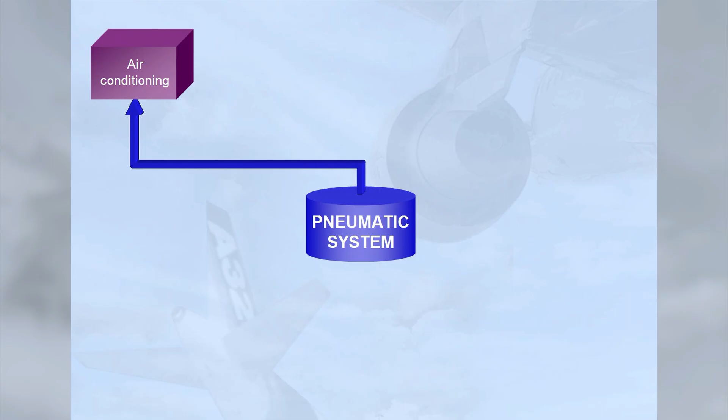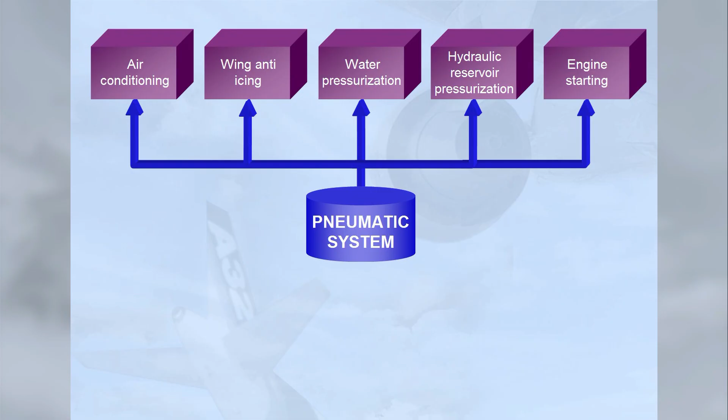The A320 pneumatic system supplies high-pressure air for air conditioning, wing anti-icing, water pressurization, hydraulic reservoir pressurization, and engine starting. High-pressure air can be supplied from three sources: the engine bleed system, the APU, or an external high-pressure ground power unit.

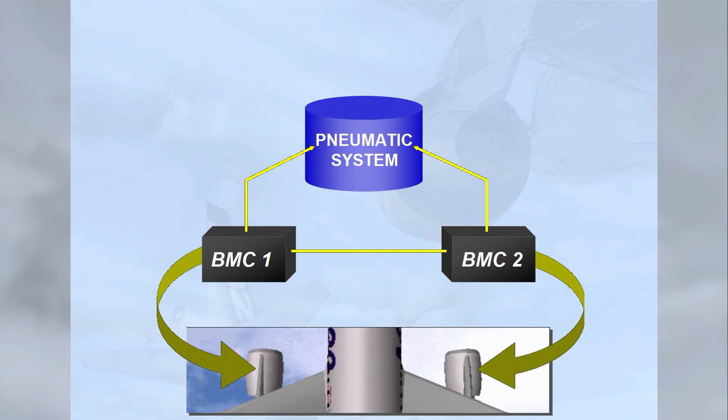The pneumatic system is controlled and monitored by two bleed monitoring computers, BMC. There is one BMC for each engine bleed system. Both BMCs are interconnected, and if one fails, the other takes over most of its functions.

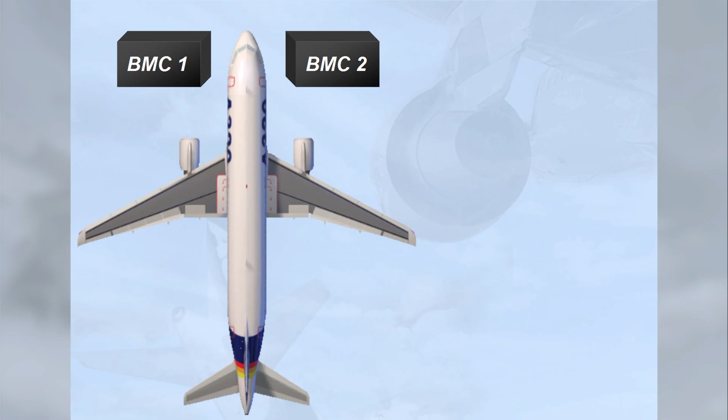There are hot air leakage detection loops installed in the vicinity of the hot air ducts in the fuselage, wings, and pylons. If a leak is detected, a signal is sent to the BMCs, which automatically isolate the affected area.

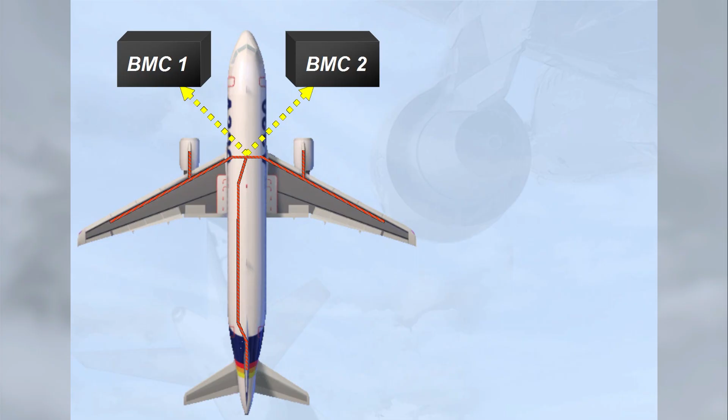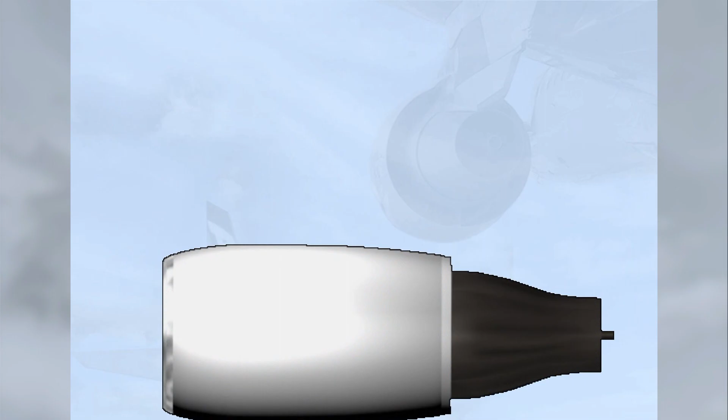In flight, the primary source for high-pressure air is the engines. Both engines have similar bleed systems. Air is bled from two compressor stages of the engine, the intermediate pressure IP port and the high pressure HP port.

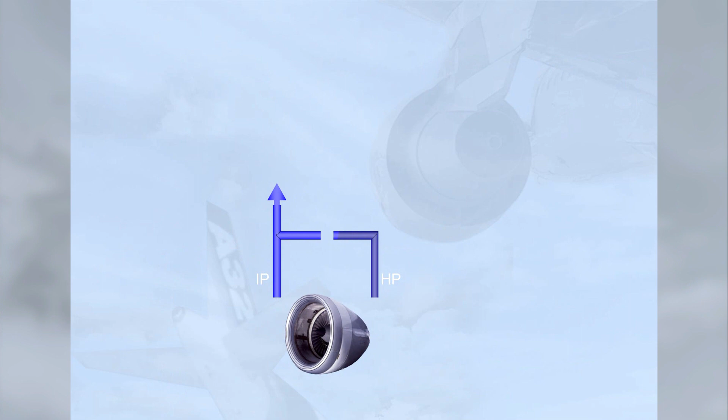There is an HP valve which can cut off bleed air from the high pressure port. It is automatically controlled by the system.

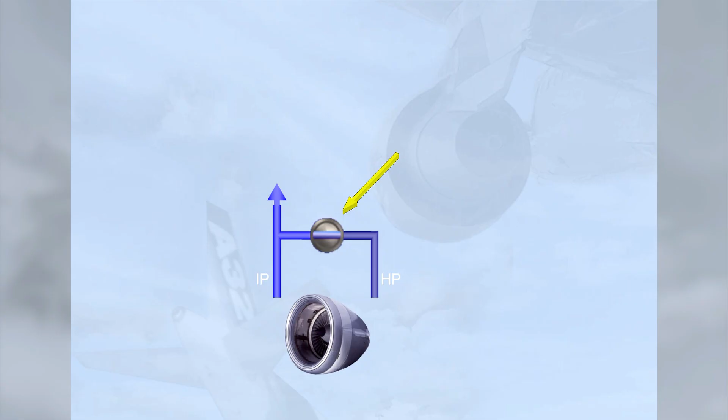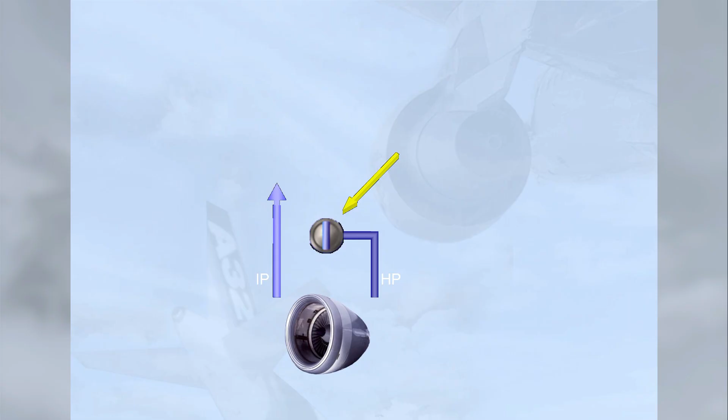The high pressure section HP is only used when there is insufficient pressure from the intermediate output IP, i.e. when the engines are at idle. Once the engine speed is high enough, the IP pressure is sufficient and the HP valve closes.

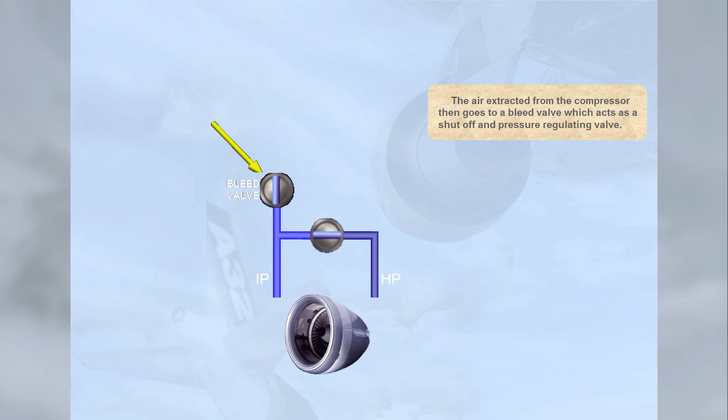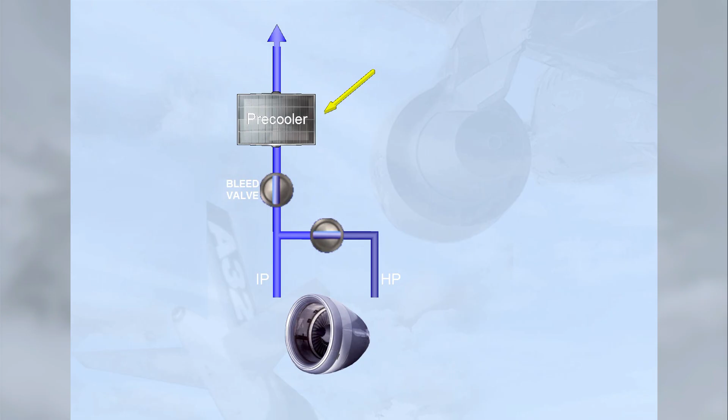The air extracted from the compressor then goes to a bleed valve which acts as a shutoff and pressure regulating valve. Since the temperature of the bleed air is high, it passes through a pre-cooler before being distributed to the users. The pre-cooler uses cool air from the engine fan to regulate the temperature.

Engine 2 has an identical bleed system. Both systems are connected by a cross-bleed duct. A cross-bleed valve permits their interconnection or isolation.

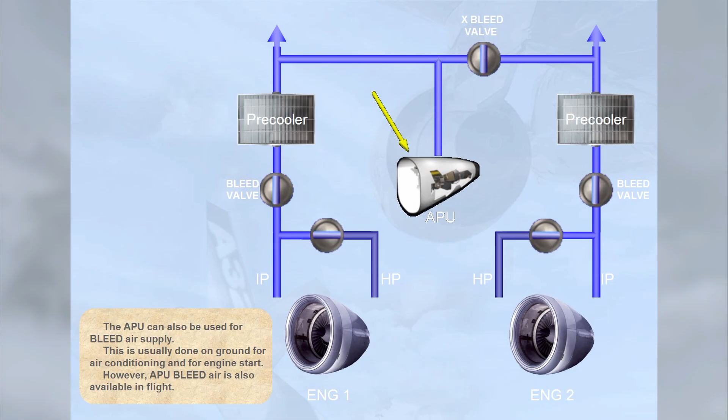The APU can also be used for bleed air supply. This is usually done on ground for air conditioning and for engine start. However, APU bleed air is also available in flight. APU bleed air is controlled by the APU bleed valve, which operates as a shutoff valve.

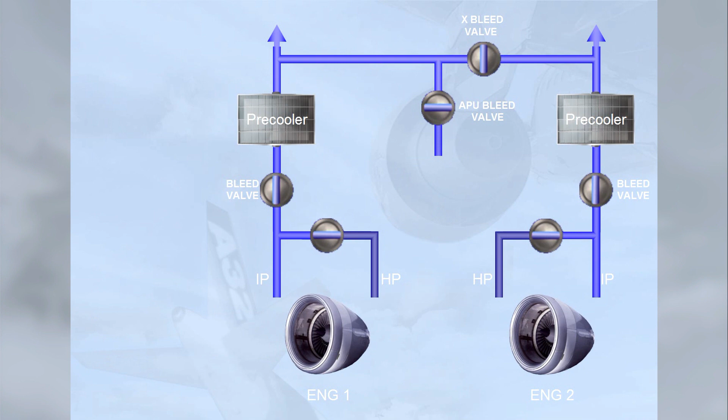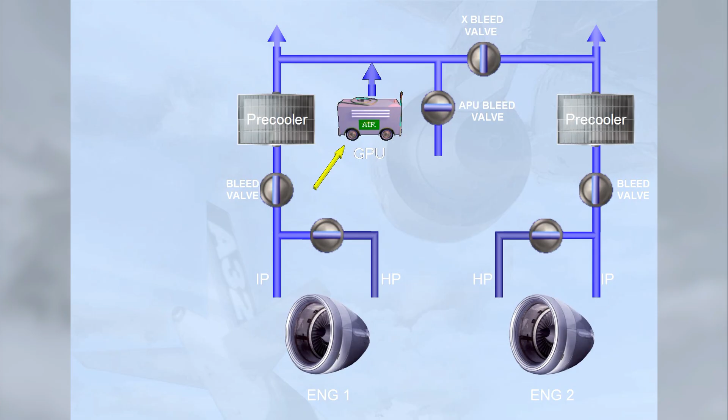Should the APU not be available, a high-pressure ground power unit can be connected. This completes the pneumatic system. We will now show you how system information is displayed to the pilots.

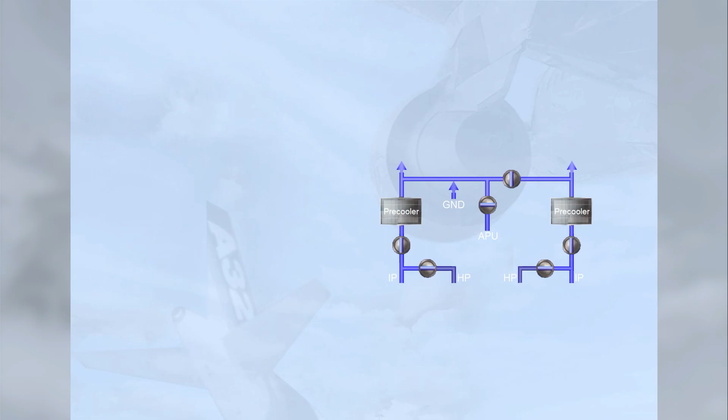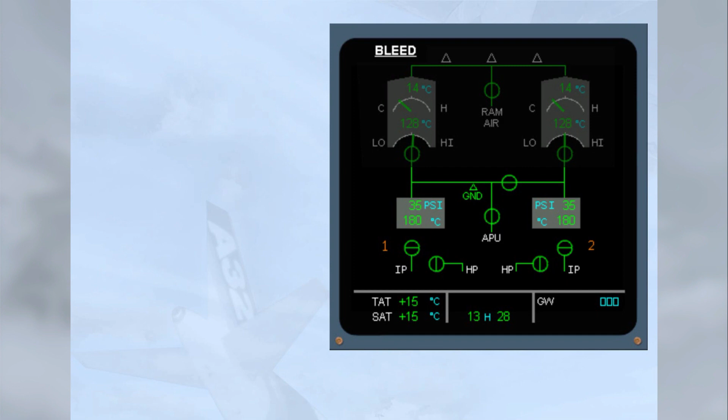The pneumatic system is displayed on the ECAM bleed page. Information on the pneumatic system is displayed on the lower part of the ECAM bleed page. Note, we have shaded the upper part of the ECAM bleed page because it is related to the air conditioning chapter. This will be covered in a later module.

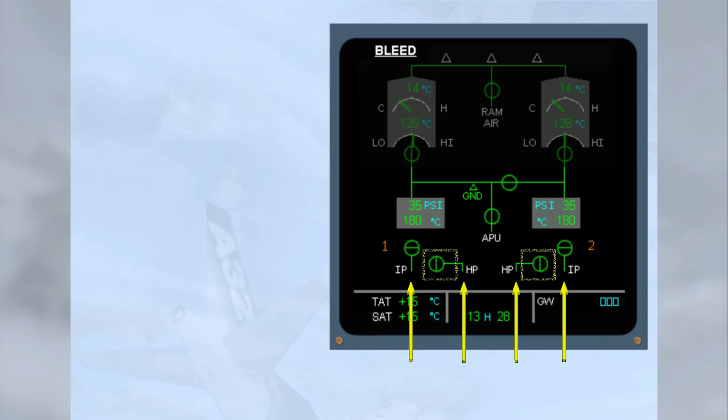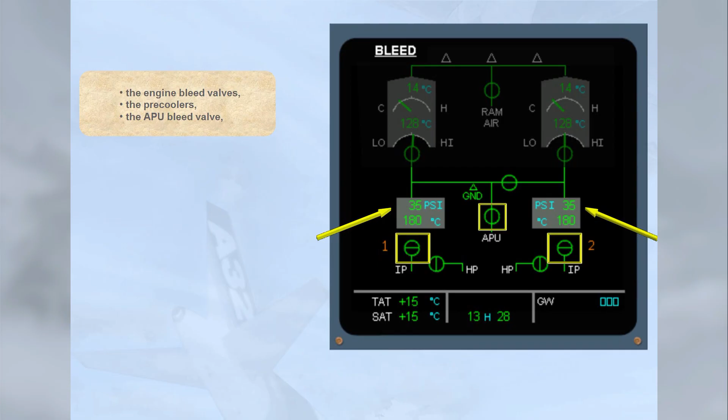Let's identify the system components on the ECAM page now: the IP and HP ports, the HP valves, the engine bleed valves, the pre-coolers, the APU bleed valve, the cross-bleed valve, the high-pressure ground connection.

The following information is also displayed: bleed air pressure, bleed air temperature, engine identification numbers.

Controls for the pneumatic system are part of the air conditioning panel, located on the overhead panel. Again, we have shaded the controls which belong to the air conditioning chapter.

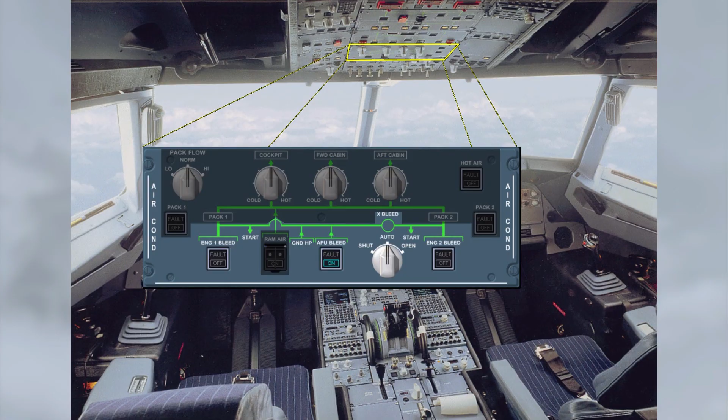Each engine bleed valve is controlled by its associated push-button switch on the air conditioning panel. The APU bleed valve is controlled by its associated push-button switch. The cross-bleed selector enables the pilot to open and close the cross-bleed valve manually or to let the system operate the cross-bleed valve automatically.

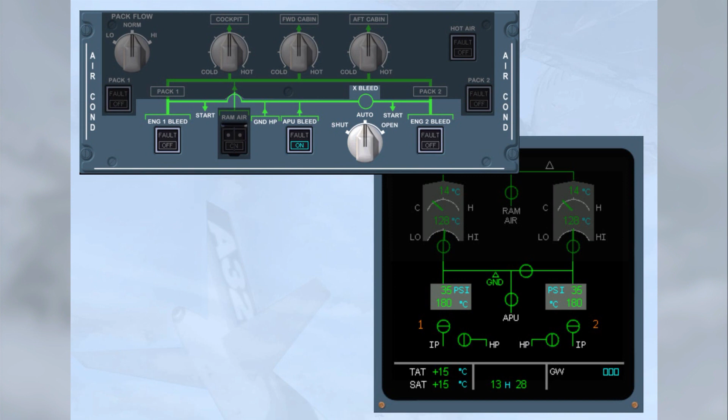You will learn to interpret all the indications and operate these controls in the normal and abnormal operation modules.